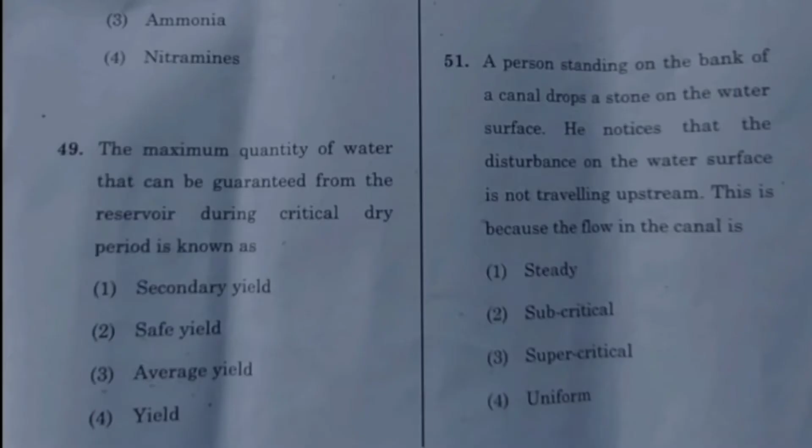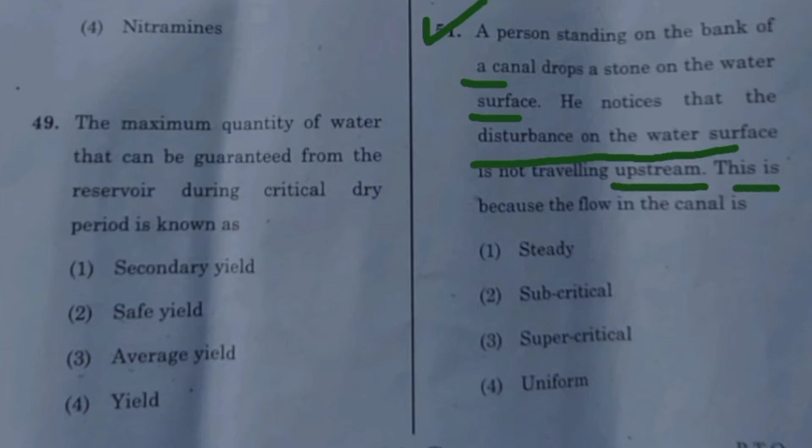Question number 51. A person standing on the bank of the canal drops a stone on the water surface. He noticed that the disturbance on the water surface is not traveling upstream. This is because the flow in the canal is supercritical. Option 3 is correct.

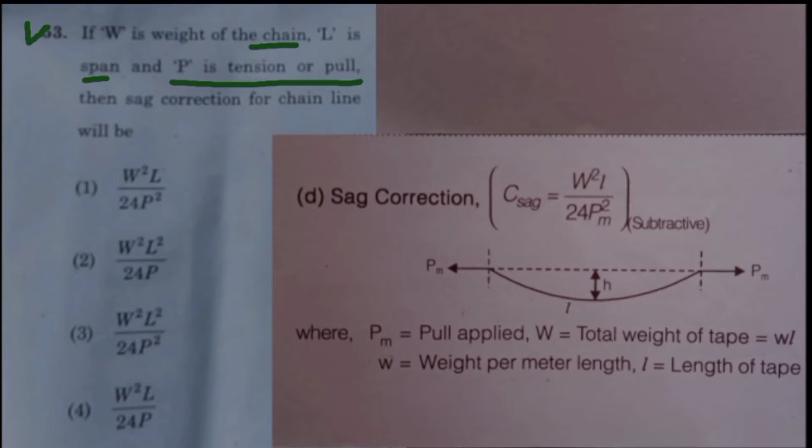Question number 53. If W is the weight of the chain, L is the span and P is tension or pull, then sag correction for chain line will be. We know that sag correction C equals W square L upon 24 P square. Option 1 is matching to the sag correction equation. These three options are not matching to this equation. Hence option 1 is the correct answer for this question.

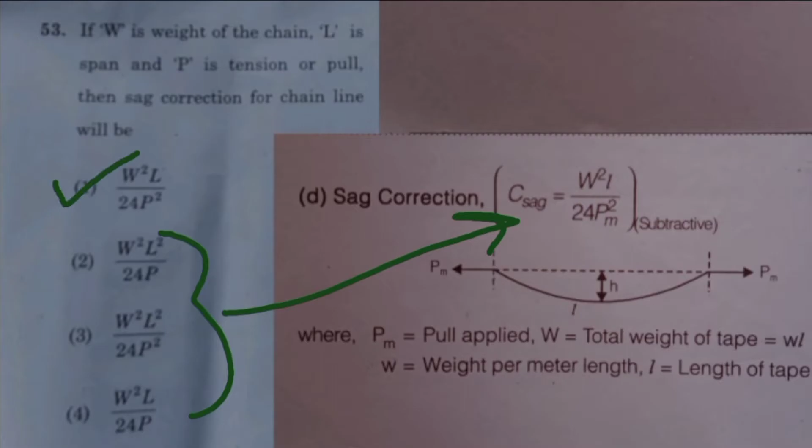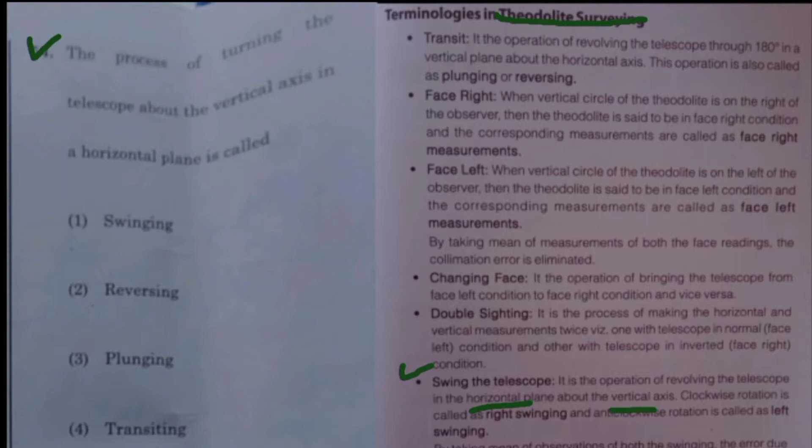Question number 54. During theodolite survey, revolving the telescope in a horizontal plane with respect to the vertical axis is called swinging, and revolving the telescope through 180 degrees in a vertical plane with respect to the horizontal axis is called transiting. Now coming to the question, the process of turning the telescope about a vertical axis in a horizontal plane is the process of swinging. Reversing, plunging and transiting, these three are the same, hence option 1 is correct.

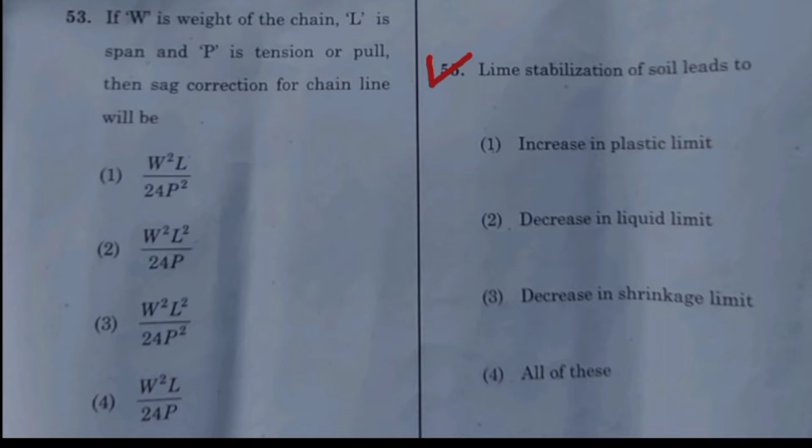Question number 55. Stabilization is a ground improvement technique. When the soil is stabilized with a special stabilizer like lime, it is said to be lime stabilization, which leads to increase in plastic limit and decrease in liquid limit. Due to the artificial arrangement of soil particles into a closer state, the shrinkage limit will decrease. Hence all of the options are correct. So option 4 is the correct answer.

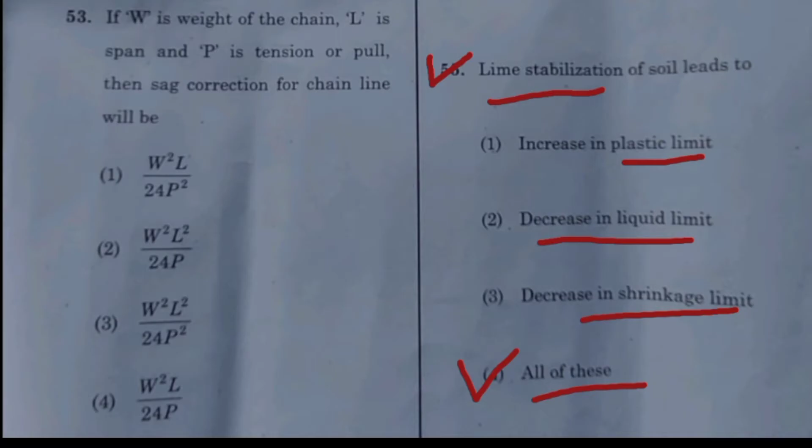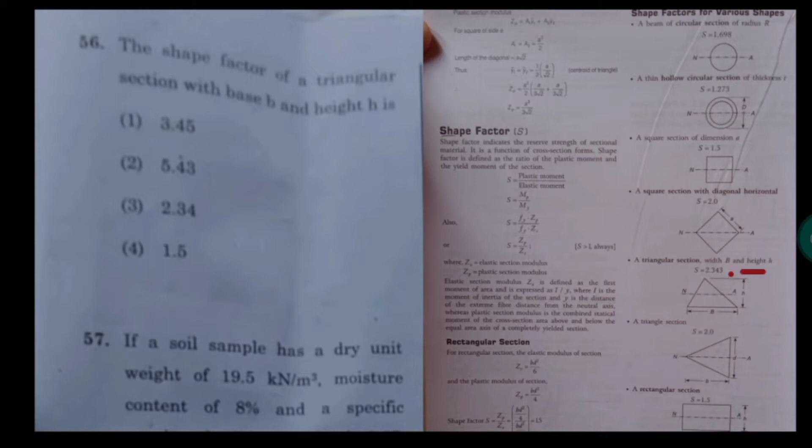Here I have given the shape factor value for different sections like a circle, hollow circle, square with diagonal horizontal, triangular with base B and height h, and rectangular section. In the question they are asking what is the shape factor for a triangular section with base B and height h. So this is the triangular section with base B and height h. So its shape factor value is 2.343. So option 3 is the correct answer.

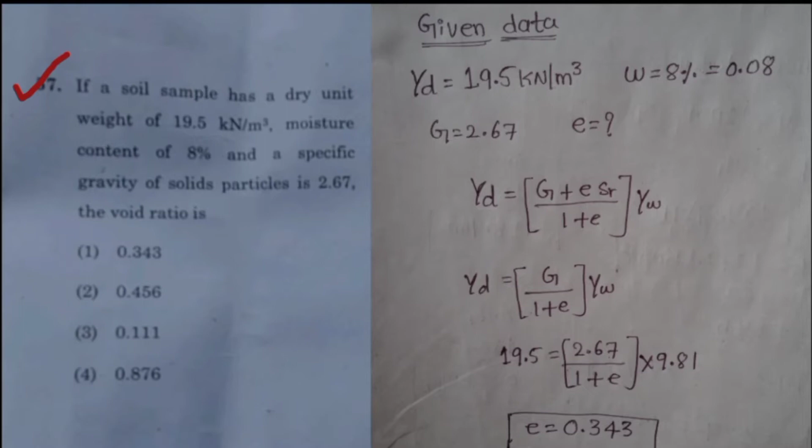Question number 57. If a soil sample has dry unit weight of 19.5 kN per meter cube, that is gamma D equals 19.5 kN per meter cube, moisture content of 8%, that is W equals 8 by 100 equals 0.08, and specific gravity of solid particles of 2.67, that is G equals 2.67, what is the voids ratio? Dry unit weight relation is given by gamma D equals G plus E into SR divided by 1 plus E, into gamma W. In the question they have given the dry unit weight, meaning the soil is fully dried.

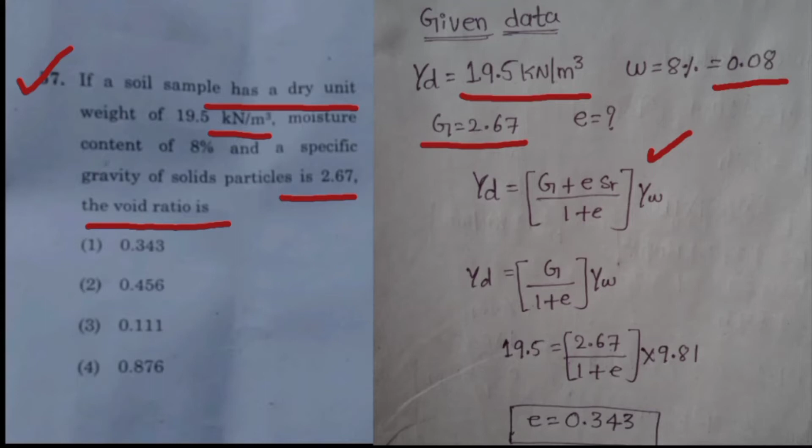For dry soil, the degree of saturation is equal to 0. 0 into E also becomes 0, hence this term goes away. Now we can write gamma D equals G divided by 1 plus E into gamma W. Put the value of gamma D, that is 19.5, and G value 2.67 divided by 1 plus E. The unit weight of water is 9.81 kN per meter cube. Simplify this, then you will get voids ratio E equal to 0.343. So the given dry soil sample has a voids ratio of 0.343. Hence option 1 is correct.

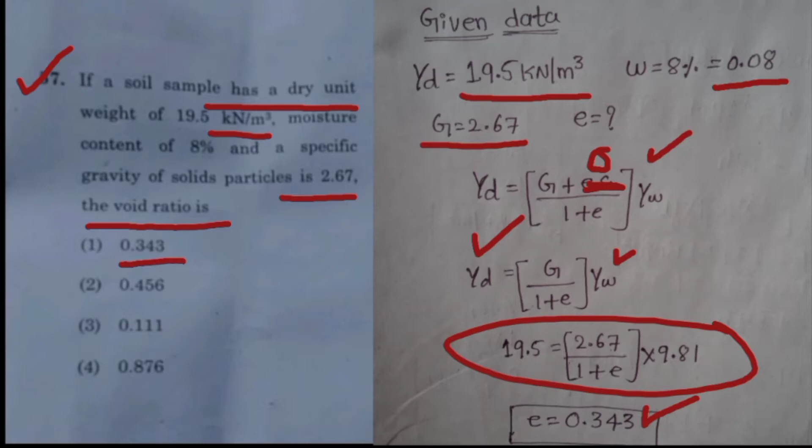Question number 58. Working out the exact quantity of various items of work is known as estimation. Quantity is nothing but the volume of a particular item of work, and valuation refers to finding the fair price of the building. Rate analysis is required to determine the quantity of labor and materials with their rates. For this question, the correct answer is estimating. So option 2 is the correct answer.

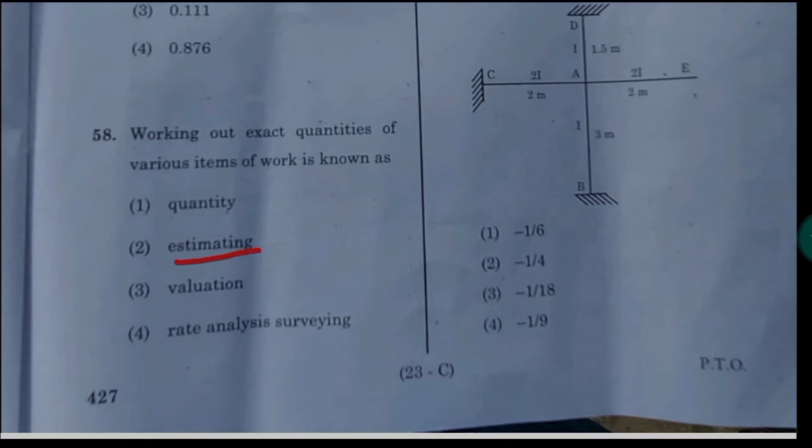Question number 59. Water is flowing in a vertical direction through two types of soil, that is type 1 and type 2.

Total head causing the flow is 10 centimeter. So they given the head, that is H equal to 10 centimeter, and 60% of total head is lost through the soil type 1. Now they saying head loss in type 1 soil is 60% of the total head, that is 60 by 100 into 10 centimeter. Then head loss in first type of soil is 6 centimeter and is of height 2 centimeter, that is L1 equal to 2 centimeter. Also they given the coefficient of permeability, that is K1 equal to 3.2 into 10 raised to minus 3 centimeter per second.

If the height of soil type 2 is 3 centimeter, that is L2 equal to 3 centimeter, then what will be the coefficient of permeability for type 2 soil? The total head, that is H equal to 100%, 60% of head is lost in type 1 soil and the remaining head is 40%, that is 40 by 100 into same height 10 centimeter. Then head loss for second type of soil is 4 centimeter.

Now apply the formula V equal to K1 into I1 equal to K2 into I2. Here I is the hydraulic gradient, that is equal to H by L, that is H1 by L1, and I2 equal to H2 by L2. Now put the value of K1, and value of H1 is 6, L1 is 2, H2 is 4 and L2 is 3. Simplify this, then you will get coefficient of permeability for type 2 soil, that is K2 equal to 7.2 into 10 raised to minus 3 centimeter per second. So option 2 is the correct answer.

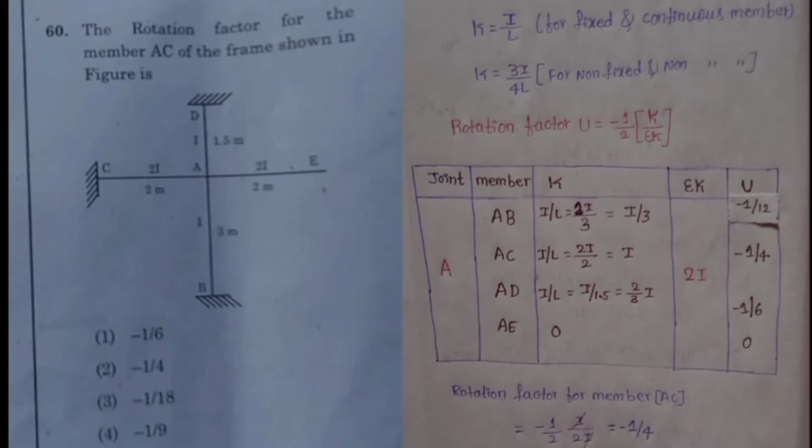Question number 60. The rotation factor for the member AC of the frame as shown in figure. They given the total frame having 4 members, that is AC, AD, AE and AB. 3 ends of these frames are fixed and 1 end is free. They say determine the rotation factor for the member AC. Rotation factor U equal to minus half of K upon summation of K, where K equal to I by L, and this formula is used when the supports are fixed and continuous member, and K equal to 3I by 4L, and this equation is used for non-fixed supports and non-continuous member.

Draw this tabular column which includes joints, member, K, summation of K and rotation factor U. First take a joint A connected to 4 members, that is A to C, A to B, A to E and A to D. Write those members AB, AC, AD and AE. Now find value of K for member AB. From A to B, the far end is fixed. I already told you for fixed support we take I by L. They given value of I equal to 1 and the length of member AB is 3 meter. So that is 1 into I upon 3, equal to I by 3.

Member AC far end is also fixed. So take I by L. Here they given the value of I for AC portion is 2I, and its length is 2 meter. 2 gets cancelled, only I will remain. Same, member AD is also having the fixed support. Apply the formula I by L; its I value is 1 and its length is 1.5 meter. So 1 by 1.5 we also write as 2 by 3 I. This is not a member because member means the distance between any two supports. At this end we don't have any kind of support, hence it is not a member. Then the value of K will become 0. Now add I by 3, I and 2I by 3. Then you will get summation of K equal to 2I.

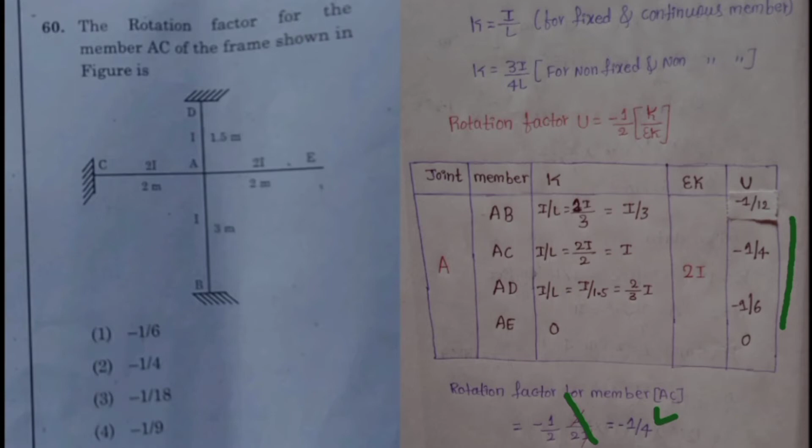Now find rotation factor for all members. For member AC, minus 1 by 2 keep as it is. Value of K for AC member is I and summation of K is 2I. I gets cancelled. Now rotation factor U equal to minus 1 by 4. And similarly find rotation factor for the other members. Hence correct answer for this question is minus 1 by 4. So option 2 is correct.

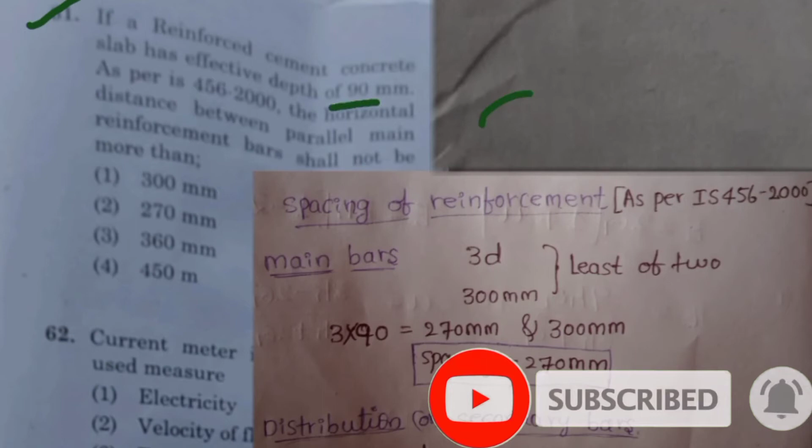Question number 61. If a reinforced cement concrete slab has an effective depth D equal to 90 mm, as per IS 456-2000, the horizontal distance between parallel main reinforcement bars shall not be more than? Spacing of reinforcement as per the code provision IS 456-2000, for main reinforcement, is 3 times the effective depth and 300 mm, least of these two. First go through 3 times of D. 3 into D, the effective depth.

They have given the effective depth as 90 mm. So 3 into 90 equals 270 mm, and the second spacing is 300 mm. Least of these two, 270 mm, is the minimum.

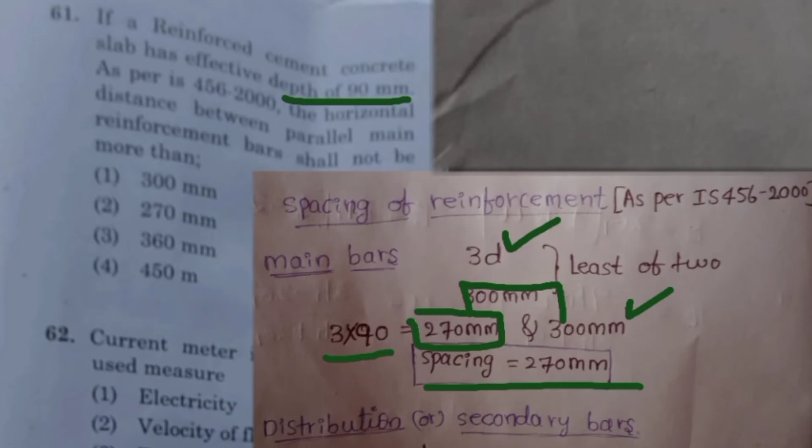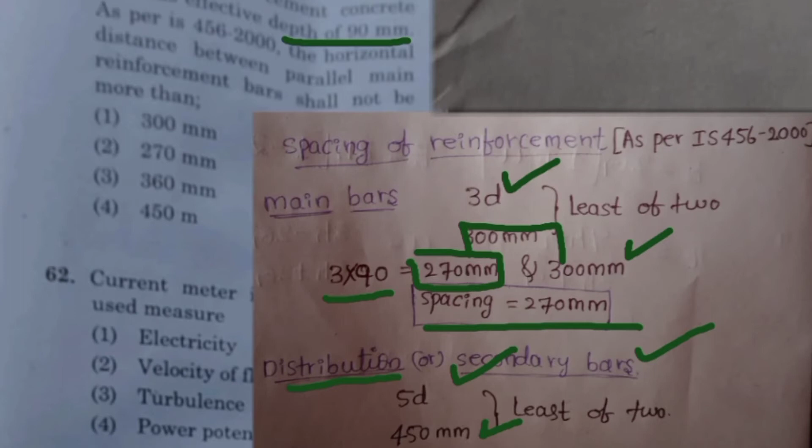Hence provide spacing equal to 270 mm for main reinforcement. Coming to distribution or secondary reinforcement, the spacing is least of 5 times the effective depth and 450 mm. They are asking spacing for the main reinforcement, that is 270 mm. Hence option 2 is the correct answer.

Question number 62. Current meter is an instrument which is used to measure the velocity of flow. This is also a direct question. So option 2 is the correct answer for this question.

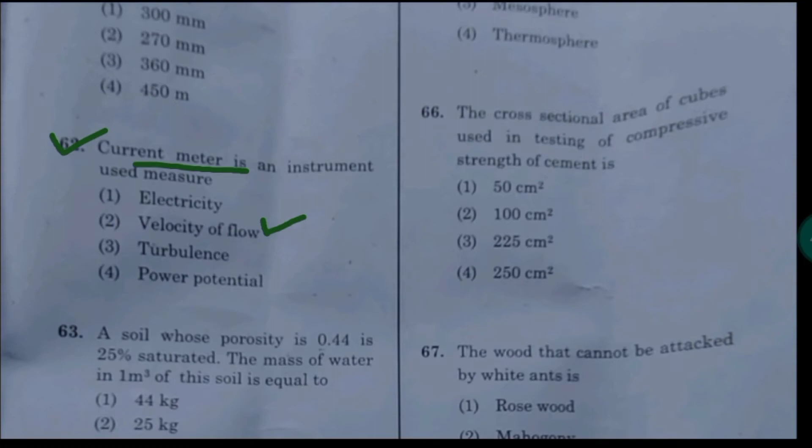Question number 63. A soil whose porosity N equal to 0.44 is 25% saturated. That means they have given the degree of saturation as 25%, which is 25 by 100 equal to 0.25. The mass of water in 1 meter cube of the soil is equal to, means we need to find out the volume of water for 1 meter cube of volume.

We have porosity N equal to volume of voids to the total volume. They have given porosity 0.44 and volume is 1 meter cube. Take this 1 into the left hand side and multiply to 0.44. Then you will get volume of voids equal to 0.44 meter cube.

Now we have degree of saturation equal to volume of water to the volume of voids. Take volume of voids into the left hand side, then volume of water equal to degree of saturation into volume of voids. They have given the degree of saturation equal to 0.25, and volume of voids is 0.44. Then volume of water equal to 0.11 meter cube.

We also know that 1 meter cube is equal to 1000 kgs. Multiply this 1000 by 0.11, then you will get volume of water in terms of kg, that is 110 kg. So option 3 is the correct answer.

Question number 64. Intangible benefits are those which are not directly measurable but have greater impact. This is a general and direct question. So option 3 is the correct answer.

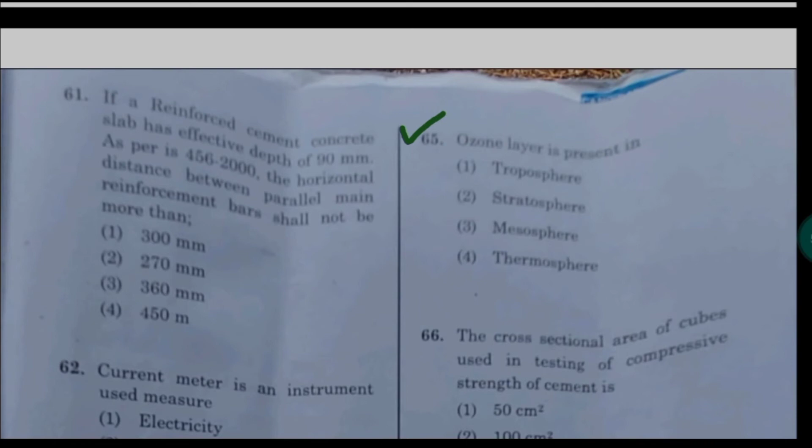Question number 65. This is a very important and most repeated question. Ozone layer is present in the stratosphere. So option 2 is correct.

Question number 66. The cross-sectional area of a cube used in testing compressive strength of cement. The standard size of cubes for compressive strength of cement is 7.06 centimeter. They are asking cross-sectional area, that is A equal to B into D. Cube all sides are equal, that is 7.06 into 7.06. Then you will get area equal to 49.84 centimeter square, nearly equal to 50 centimeter square. So option 1 is the correct answer.

Question number 67. The wood that cannot be attacked by white ants is teak wood. This is also a direct question. So option 4 is correct.

Question number 68. The compressive strength of heavy duty bricks should not be less than. For heavy duty bricks, the compressive strength should not be less than 40 Newton per mm square. This is from building material. So option 1 is the correct answer for this question.

Question number 69. There are mainly 5 ingredients of paints: base, vehicles, dryers, coloring pigments and solvents. Base is a solid substance in a fine state, and this will impart durability and reduce shrinkage cracks on the plastered surface.

Coming to vehicles, these are the liquid substance which hold the paint ingredients and also act as a binder for the various pigments. Linseed oil, tung oil, poppy oil, nut oil are the commonly used vehicles.

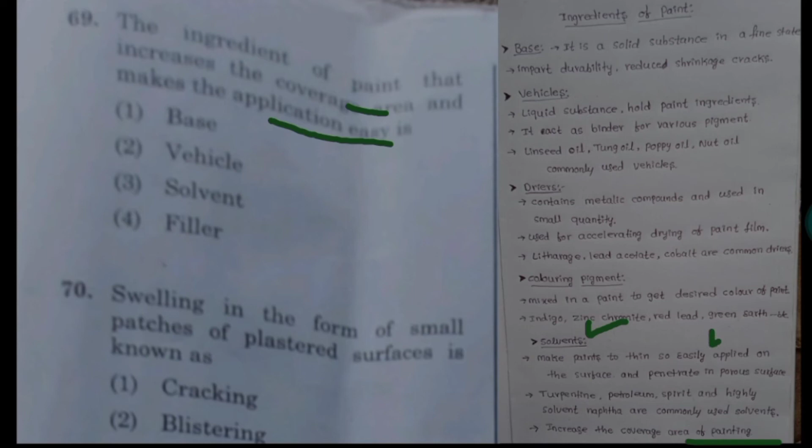This is the property of the solvents. It will increase the coverage area and can be easily applied on the plastered surface. So solvents is the correct answer, hence option 3 is the correct answer.

Question number 70. Swelling in the form of small patches of plastered surface is known as blistering. This is also a simple and direct question, so option 2 is the correct answer.

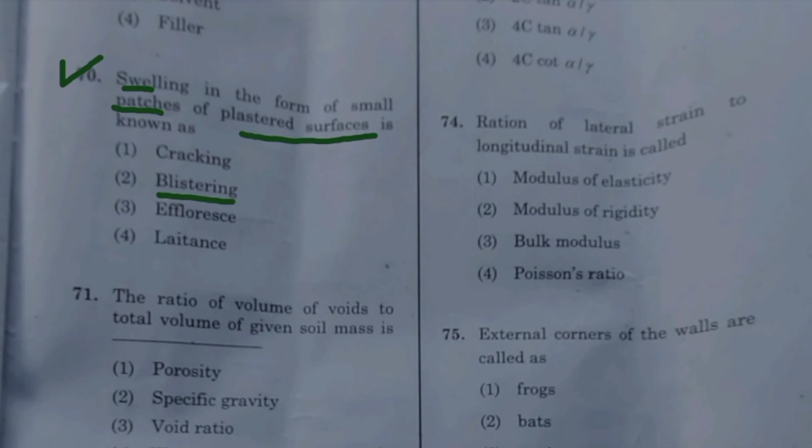Porosity is the ratio of volume of voids to the total volume of the soil. Mathematically, N equals Vv upon V into 100, where Vv is the volume of voids and V is the total volume. The porosity range is greater than 0 and less than 100.

Water content is the ratio of weight of water to the weight of solids. Mathematically, W equals Ww by Ws into 100, where Ww is the weight of water and Ws is the weight of solids. There is no upper limit for the water content; it can be greater than 100.

Specific gravity is the ratio of weight of a given volume of solids to the weight of an equivalent volume of water at 4 degrees Celsius. Mathematically, G equals Ws divided by Vs into gamma W, also written as gamma S by gamma W. For inorganic soil solids, specific gravity ranges from 2.6 to 2.75, and for organic soil solids, from 1.2 to 1.4. Note that the specific gravity of fine-grained soil is always greater than that of coarse-grained soil.

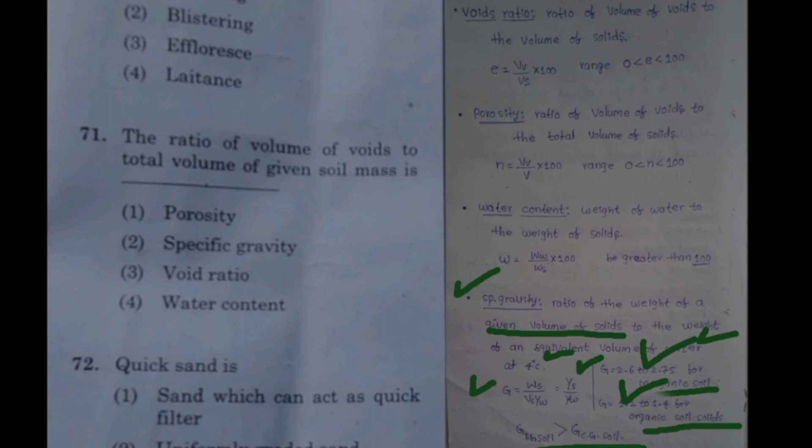Now coming to the question, the volume of voids to total volume of given soil mass is called porosity. So option 1 is the correct answer.

Question number 72. Quicksand is not a type of sand. It is a condition when cohesionless soil loses its shear strength due to upward flow of water. Cohesionless soil means sand; it loses its shear strength due to the upward movement of water. So option 3 is the correct answer.

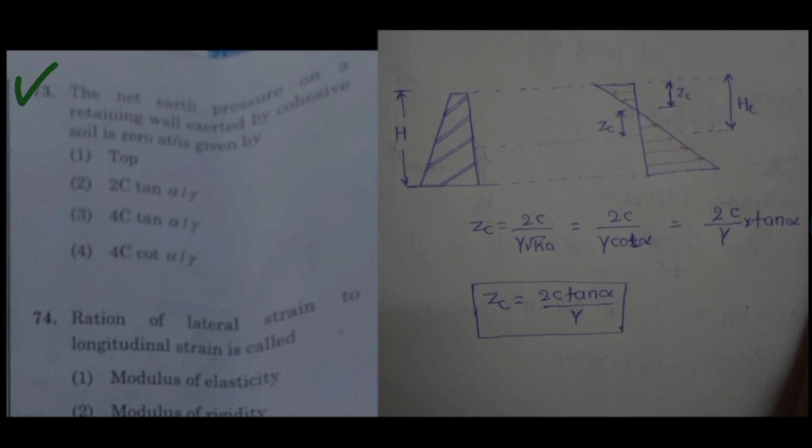Question number 73. The net earth pressure on a retaining wall exerted by cohesive soil is 0 at, is given by. This is a retaining wall of height h. They are asking at what depth the earth pressure will be 0 on the retaining wall. That is at depth ZC, where the earth pressure will be 0.

ZC is given by 2C upon gamma into root Ka, where C is the cohesion, gamma is the unit weight of soil, and Ka is the coefficient of active earth pressure. Root Ka is also written as cot alpha, and 1 by cot alpha equals tan alpha. Now the zero earth pressure on the retaining wall at depth ZC from the top surface is given by 2C tan alpha upon gamma. So option 2 is the correct answer.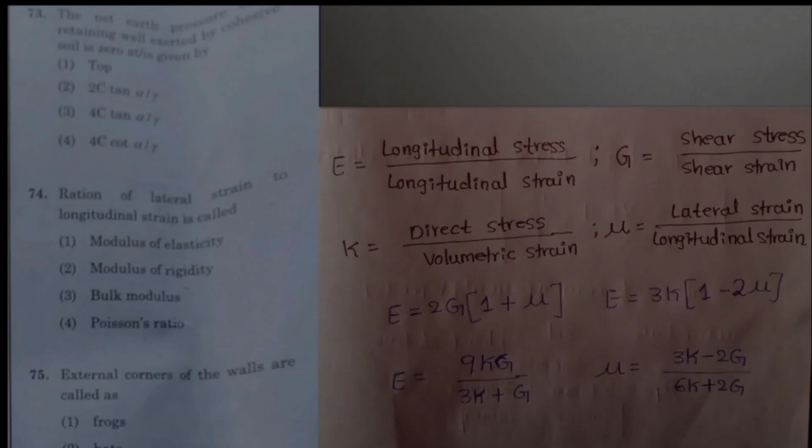Question number 74. Young's modulus E equals longitudinal stress upon longitudinal strain. Modulus of rigidity or shear modulus equals shear stress upon shear strain. Bulk modulus K equals direct stress upon volumetric strain. Poisson's ratio mu equals lateral strain upon longitudinal strain. E, K, G, mu are the four elastic constants.

The relations between the four elastic constants: Young's modulus E equals 2G into (1 plus mu), and also E equals 3K into (1 minus 2 mu). Young's modulus E is also equal to 9KG upon (3K plus G). Poisson's ratio mu equals (3K minus 2G) upon (6K plus 2G). Definitions of elastic constants and relations between them are very important from an examination point of view. Remember the definitions as well as the relations.

Now coming to the question, the ratio of lateral strain to longitudinal strain is called Poisson's ratio. So option 4 is the correct answer.

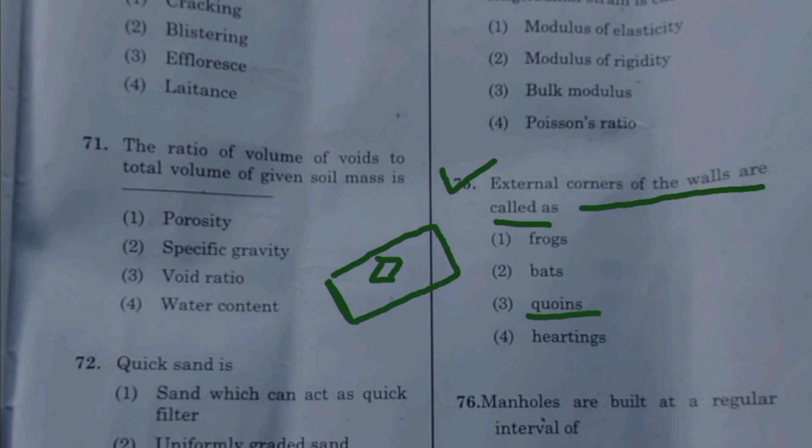Question number 75, the last question of this series. The external corners of the walls are called quoins, and the small depression over the top surface of the brick is called the frog. When bricks are cut into two halves across the width, it is called a bat.

The material used for filling cavities is called hearting. For our last question, quoins are the correct answer, so hence option 3 is correct.